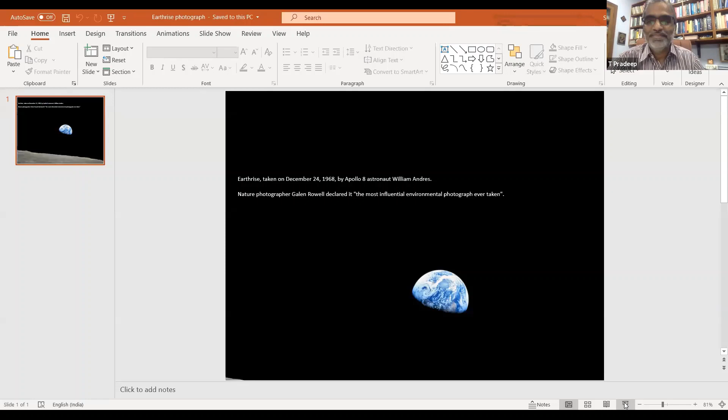Concern for the other is, in fact, the greatest human characteristic. It's in fact embedded in democracy.

One day, a child asked Mahatma Gandhi, 'Bapu, can you please define democracy?' Bapu said, 'Imagine that you are running a race and you have won it. When you win, remembering that there were others to lose is democracy.' Then he said, 'If you run alone, no one will win.'

Care for the minority, the underprivileged, and in the current context, the marginalized species, is in fact concern for the other. It is the greatest human gift.

We are here on this planet as nature enabled it. This enormously complicated ecosystem and its very delicate balance is evident in this COVID-hit period. If you do not see that complexity and yet simplicity, there is something wrong in our education.

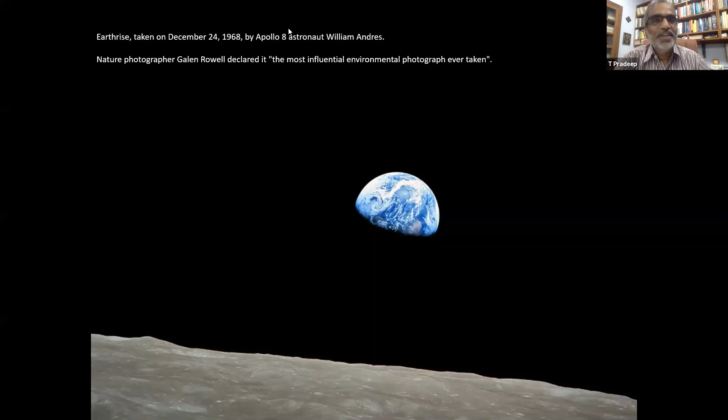Today we have two fantastic speakers, Dr. Saravanan and Ms. Shanta Sheila Nair - one telling us about capacity building, the other about policy. Both are equally important in making rainwater harvesting a reality.

And we'll conclude today with Jagat Singh Chowdhury, an eminent environmentalist who, with his life, has shown that a small piece of land can be converted into a natural rainforest. What a wonderful way to celebrate World Environment Day. Thank you very much.

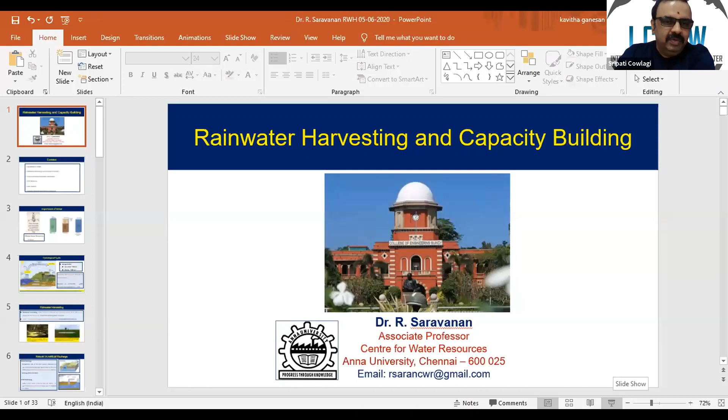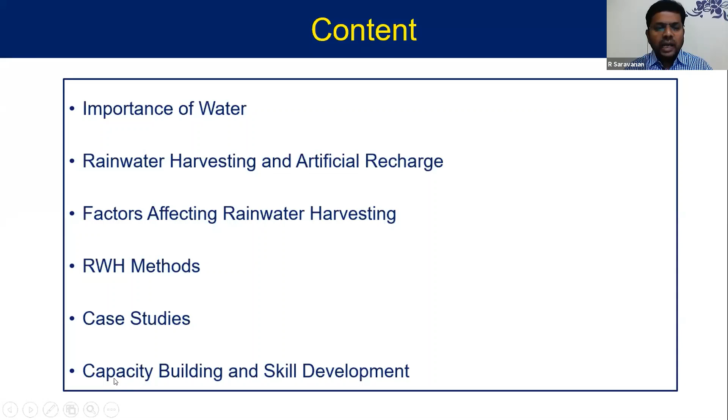Yes. Okay, so good afternoon, good evening, and good morning, wherever you are. I am here to present rainwater harvesting and capacity building. My presentation content goes like this: importance of water, rainwater harvesting and artificial recharge, the factors that affect the rainwater harvesting mechanism, the different types of rainwater harvesting methods, case studies related to rainwater harvesting carried out by the Centre for Water Resources, and capacity building and skill development ideas related to rainwater harvesting.

Now, the first slide talks about the importance of water. If you see the picture, you can understand very well. Once you carry your own water, you will learn the value of every drop of water. As you all are aware, the global water resources are constant. You can't create water, just as you can't destroy water. It will convert from one form to another. Our duty is only to manage the water.

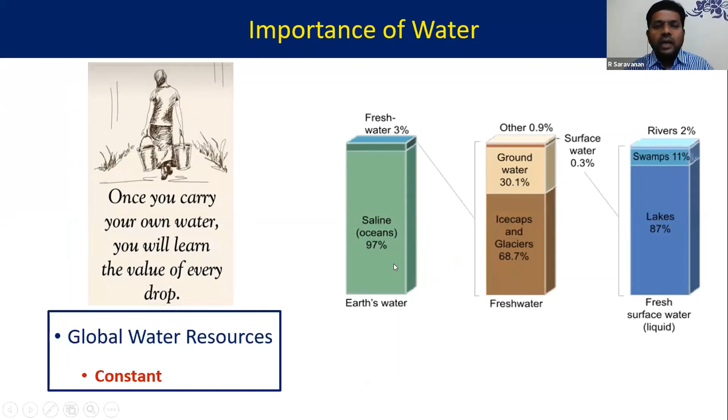So this graph indicates the global water availability, which you are all aware of. Now coming back to the hydrological cycle, the important component here is that around 80% of global precipitation takes place on the ocean, and 20% takes place on land.

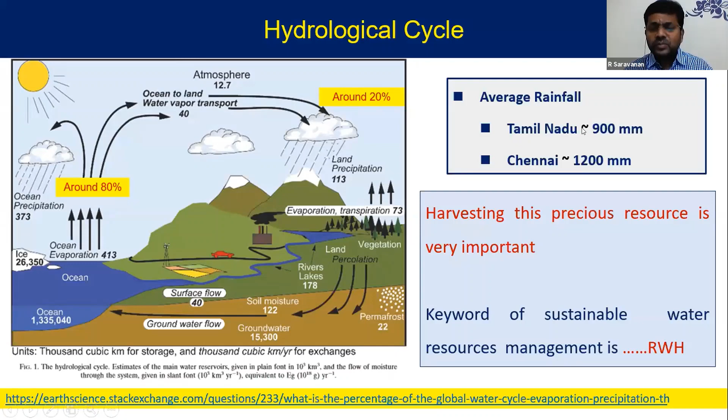Now you must be aware how precious rainwater harvesting is, and therefore the keyword of sustainable water management is nothing but rainwater harvesting. Chennai receives nearly 1,200 mm as the annual average rainfall, and Tamil Nadu's annual average rainfall is nearly 900 mm.

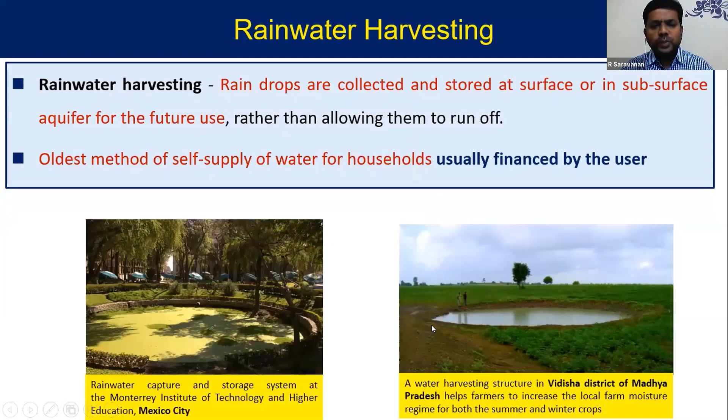Now, rainwater harvesting. We have several definitions for rainwater harvesting. Here I would like to quote it as: the raindrops are collected and stored at the surface or as a subsurface aquifer for future use, rather than allowing them to run off. This is the oldest method of self-supply of water for households, generally financed by the user. These are two pictures taken from Mexico and Madhya Pradesh, India, showing traditional rainwater harvesting practices.

Now coming back to the difference between natural and artificial recharge. Natural recharge refers to the precipitation which falls on the land surface, infiltrates into the soil, and moves through the pore spaces down to the water table by gravity. This generally takes place through leaking aquifers, rivers, streams, lakes and wetlands. On average, 10 to 20% of rainfall gets recharged to the groundwater by natural means.

But if you want to alter the natural recharge, you can inject water by altering the infiltration capacity. That means excess surface water can be directed into the ground by spreading it over a large area, as well as injecting it into recharge wells to replenish the aquifer. This kind of method is called artificial recharge. So both are by gravity, but this is a forced one.

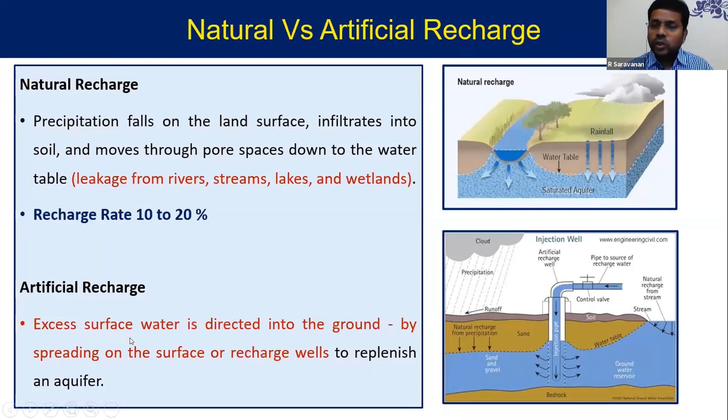Now, the factors affecting rainwater harvesting. There are so many factors affecting rainwater harvesting. Broadly, we can classify them into 4 categories: environmental factor, technical factor, economic factor, and operational factor. I would like to emphasize only a few points on all these factors: rainfall intensity, catchment area, and curve number. These are all the main important parameters for estimation of the runoff potential.

This is the simplest calculation given to estimate the runoff potential. Generally we estimate the runoff potential in terms of volume, whereas the recharge will be in terms of meters per day, which is the rate of recharge. So there is a difference between these two things, as you are aware.

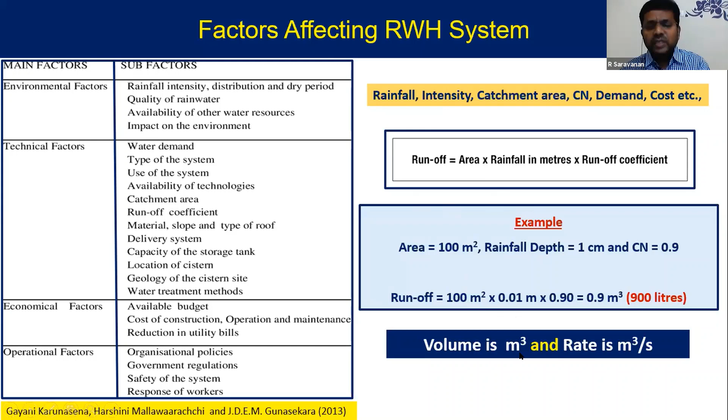This figure indicates how to estimate the volume of water one can harvest from the surface, either from rural catchment or urban catchment, as well as the rate of recharge capacity of any recharge mechanism, using these two figures. For example, to estimate the volume of runoff, it requires the catchment area and rainfall depth multiplied by the runoff coefficient, which is nothing but the curve number. If you multiply these, you will get the volume of water. With this, you can plan how much water you want to conserve in a lake, river, or ponds, wherever you want.

Whereas in case of recharge rate, if you want to estimate it, you must know the wetted area of the well or recharge pit, which is nothing but the circumference area multiplied by the hydraulic conductivity of the medium. Once you multiply these two factors, you will come to know how much water exactly you can inject from your recharge shaft or recharge mechanism into the ground, because there is a relation between how much head you are creating and how much water can penetrate into the ground.

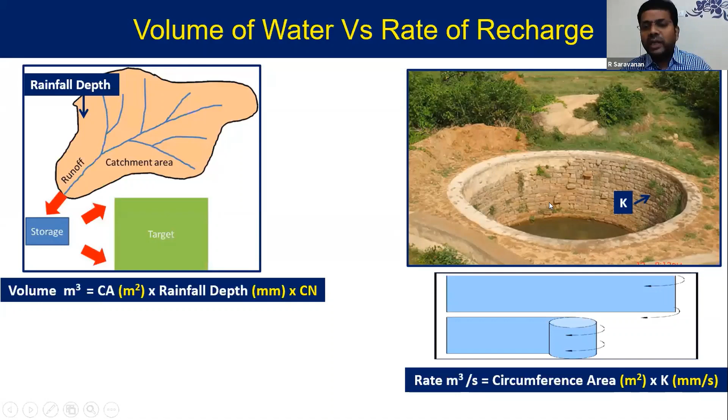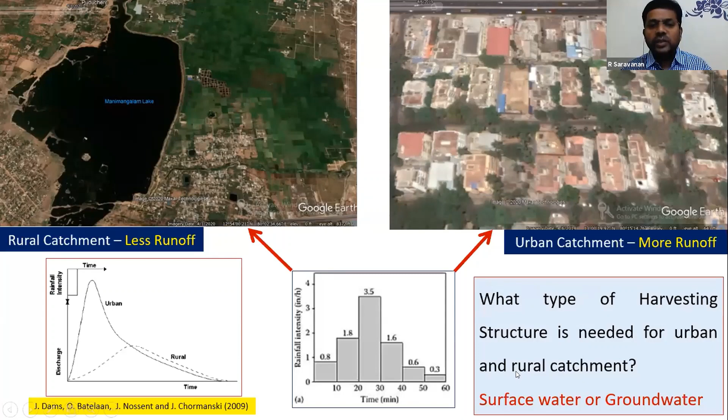Now, hydrogeology is the other factor which influences your rainwater harvesting mechanism. It plays an important role in deciding the type of mechanism because it depends on the aquifer properties.

The movement of water into the soil is governed by two forces: gravitational force and surface tension force. These are the predominant forces that allow water to move from the top surface to the ground. If you take sand, loam, and clay, sand will absorb more because gravitational force is much higher than surface tension force. In clay, surface tension force is more than in sand, which causes it to adhere a lot of water and not allow it to easily pass to the ground.

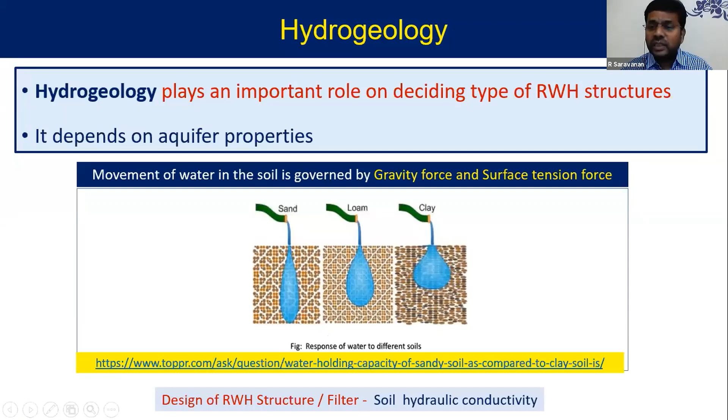Therefore, if you want to be a rainwater harvesting designer, you should understand these behaviors to design your rainwater harvesting structures as well as filters, based on the hydraulic conductivity.

Now, the groundwater movement: whatever water enters into the ground is generally called groundwater. The specific definition is the water available below saturation of the water table, called groundwater.

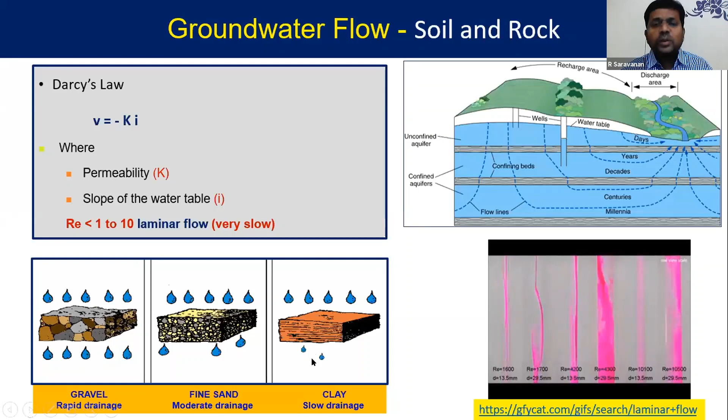Therefore, recharge or injection takes its own time to recharge the groundwater table, which is what I want to emphasize. But this figure also indicates that if you recharge 5 drops of water in a gravel medium, it immediately absorbs all 5 drops, whereas clay absorbs only 30% or less than 10% into the ground.

These mechanisms are highly required to decide what type of rainwater harvesting mechanism to use in rural as well as urban catchment. We have broadly 4 types of mechanisms: direct surface technique, direct subsurface technique, combination techniques, and indirect techniques. The first three are almost familiar to you.

The indirect techniques are nothing but forced injection and pressure injection. Suppose cracks are not available and the porous medium is not available within the ground's geological formation, you can blast the ground to make artificial fractures and inject the water into the ground.

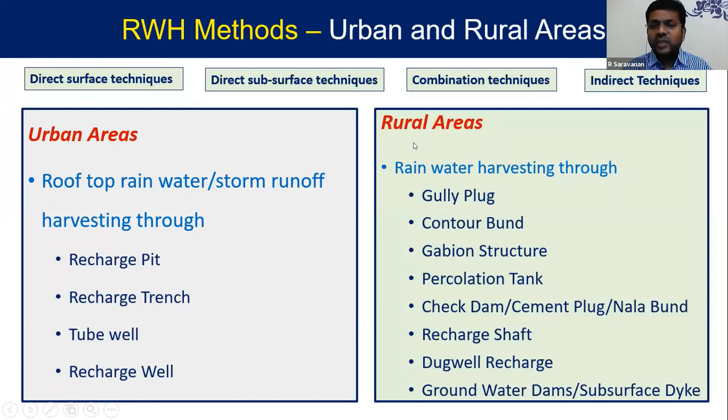Coming back to the urban rainwater harvesting type, generally we harvest rainwater from stormwater and roof, which is harvested in the recharge pit, trench, tube well, and recharge well. In case of rural areas, we have several methods which we will discuss in due course.

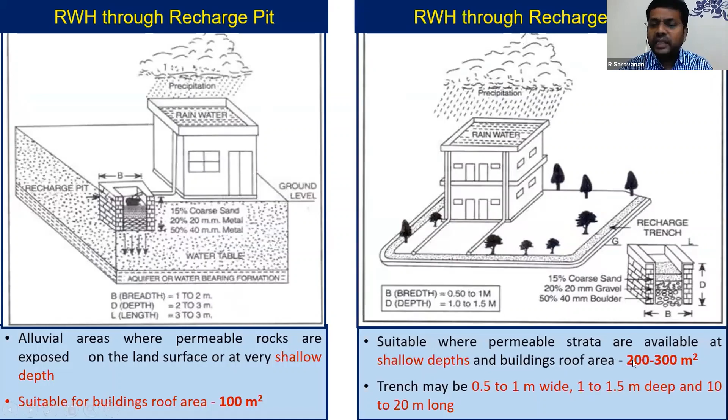Now, rainwater harvesting in urban areas. When deciding rainwater harvesting in urban areas through stormwater or roof water, the recharge pit is suitable when you have a roof area of nearly 100 meters square and a shallow water table depth is available. In case of recharge trenches, where you have shallow water table level and catchment area ranging from 200 to 300 meters square, trenches are preferred.

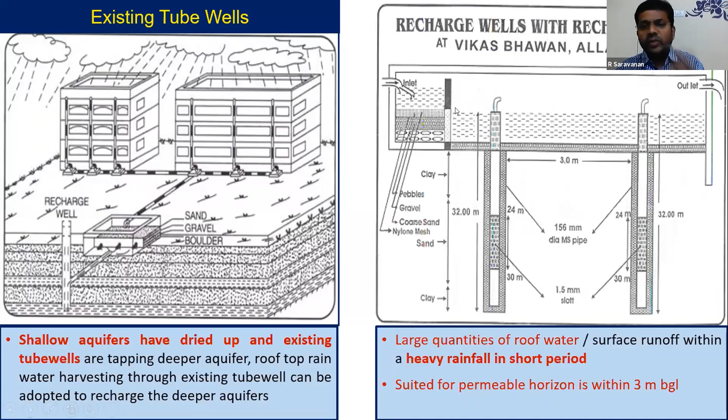You can also use existing tube wells, including abandoned ones, to harvest stormwater as well as roof water and inject it into the aquifer, either confined or unconfined. Due to climate change, rainfall intensity can be very high within a short period, causing huge runoff quickly. At that time, to store and inject the water, you need a combined method: the trench along with the recharge shaft.

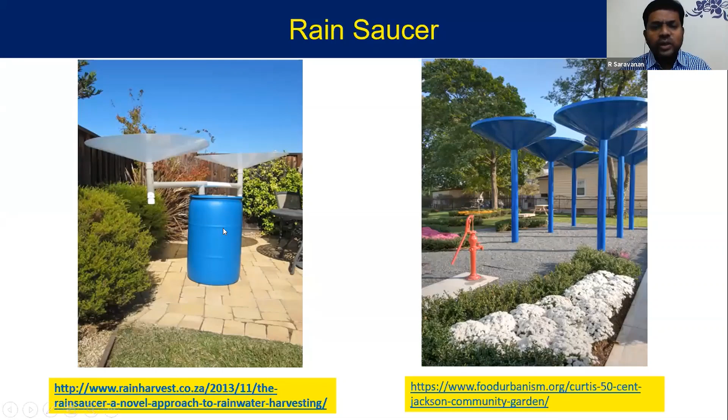Now for another method, this one is portable as well as ornamental, derived from our indigenous technology. It's called a rain saucer. You can carry it anywhere, and it can be installed in gardens and lawns. Most people think of rainwater harvesting only through roofs, harvesting into drums and tanks and similar things.

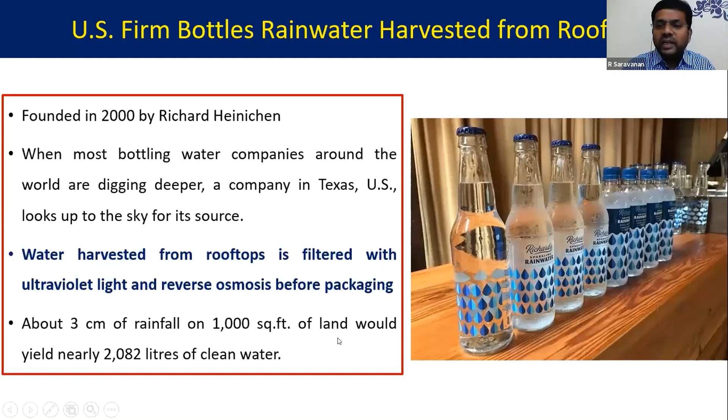A person from the US, in 2000, named Richard Heinichen, noticed that most water companies around the world were digging deeper to extract groundwater for bottling. Instead, he sought water from the sky, harvesting it from rooftops and filtering it with UV light and reverse osmosis before packing. He estimated that 3 centimeters of rainfall over 1,000 square feet of land would yield nearly 2,082 liters of clean water.

Now coming back to rainwater harvesting systems in rural areas, we have several methods. One is the gully plug, or contour bund method. This method is basically used to conserve soil moisture in the watershed for a long period, and is more suitable for low rainfall areas.

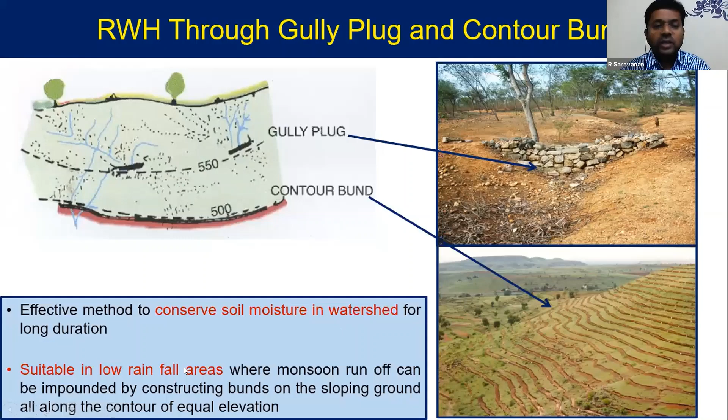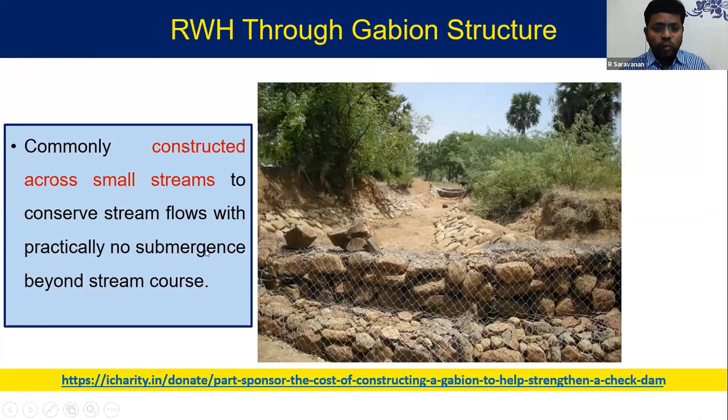This is the gabion structure, which tries to obstruct the flow temporarily and is commonly constructed across small streams to conserve water and improve the local groundwater table level in the surrounding area.

And the percolation tank. Generally, percolation tanks are preferred where you have highly fractured and weathered rock available, and the downstream of the tank should have a sufficient number of wells as well as cultivable land. If these are available, this method is preferred to benefit the people in the command area.

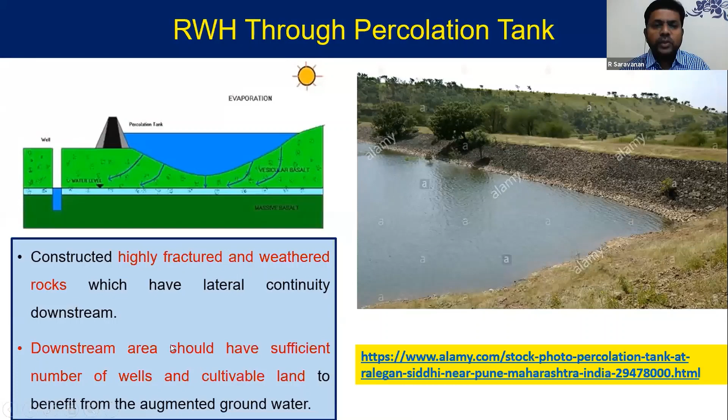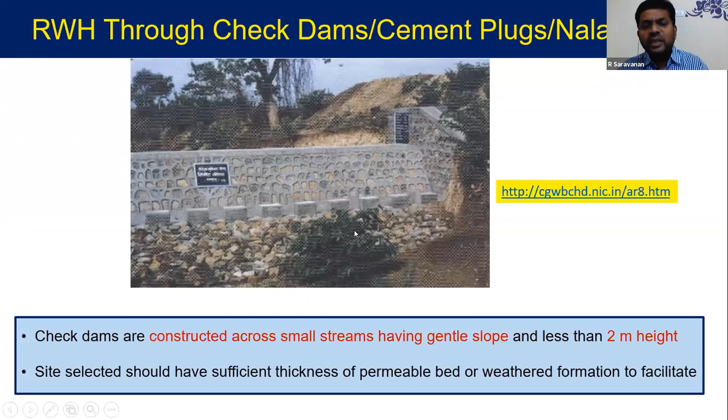Then the check dams, also called cement plugs or nala bunds, which are highly suitable across small streams with a gentle, mild slope. Generally these structures are recommended to be less than 2 meters, and they basically retard the flow for a certain time to recharge the groundwater.

Then the recharge shaft. Recharge shafts are widely used in tanks and lakes to infiltrate water into the lower unconfined aquifer by means of the recharge shaft.

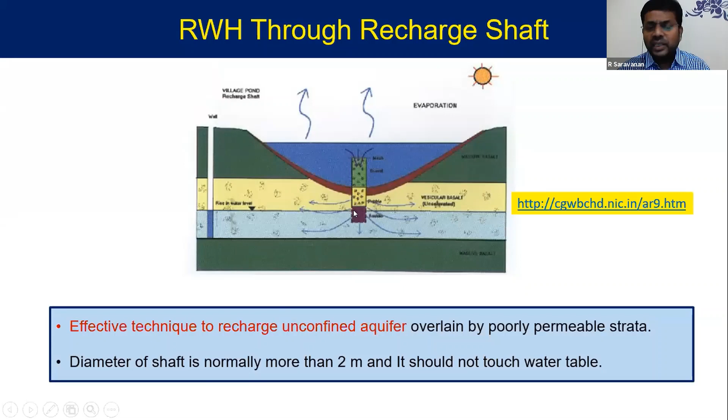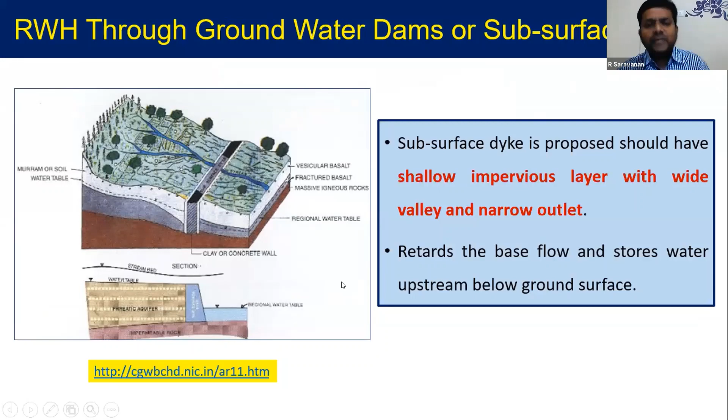Now coming to capacity building, I'd like to talk about our own Center at Anna University. The Center for Water Resources was established in 1971 and is a pioneer center carrying out rainwater-related studies and capacity building for the past three decades, working with different agencies, both government and non-governmental organizations, in various capacities as consultant, implementing agency, expert, and so on. I'm proud to say that Times Higher Education has ranked Anna University 7th in the world in water resources among about 800 universities worldwide.

This ranking is due to our focus on the sustainable development goals. The center has faculty members from diverse disciplines in water resources engineering and management, who are experts in various tools and software related to water resource management. We are fully equipped to develop capacity building at any level.

The center also offers PG programs like hydrology, water resource engineering, and irrigation water management, which enable students to build capacity in water management. Rainwater harvesting is incorporated in our syllabus for both undergraduate and postgraduate students to build their capacity. The center also frequently conducts workshops, training programs, and stakeholder meetings related to water management as part of capacity building.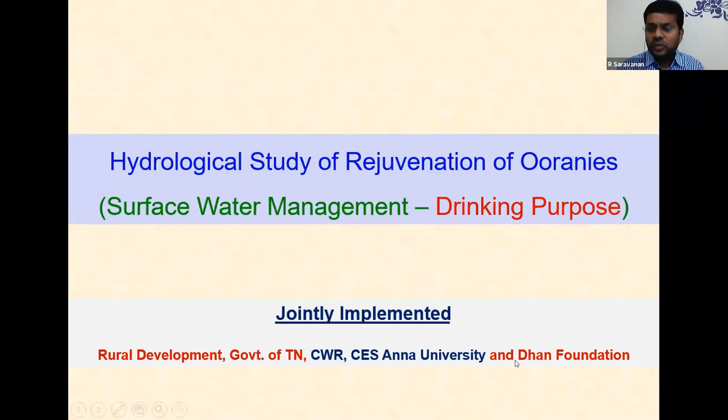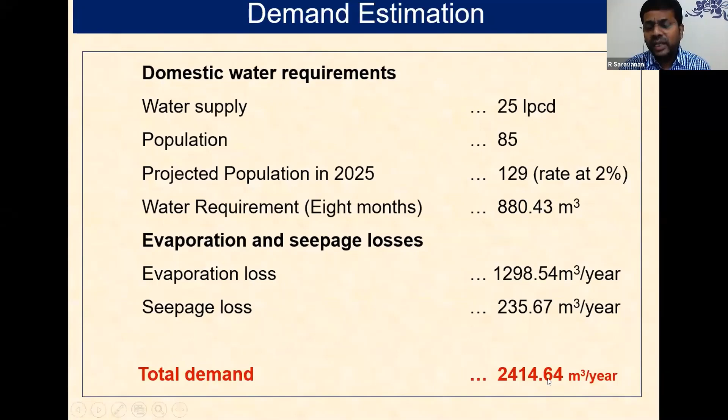The tank, a small tank, was taken from Kanchipuram district, Edaiyur village, Thirukkalukundram block. The name of the Urani is Sulthanmedu Oorani, and we estimated the demand for the total year. Since 3 months is the rainy season, we considered only 9-month demand as a capacity to design the Oorani. So we arrived at nearly 2,400 metric cube per year as the drinking water demand for the Urani, at the rate of 25 LPCD.

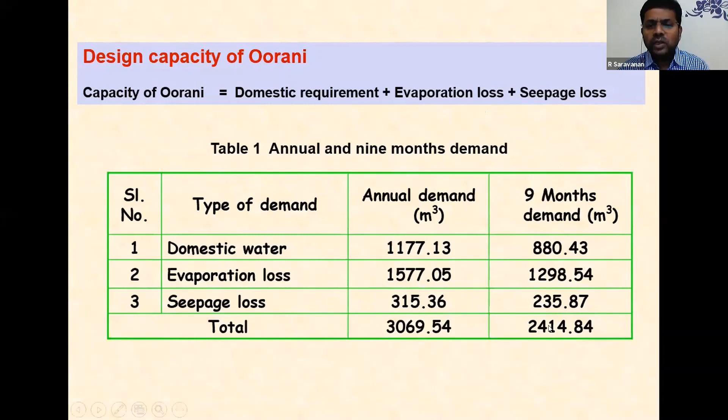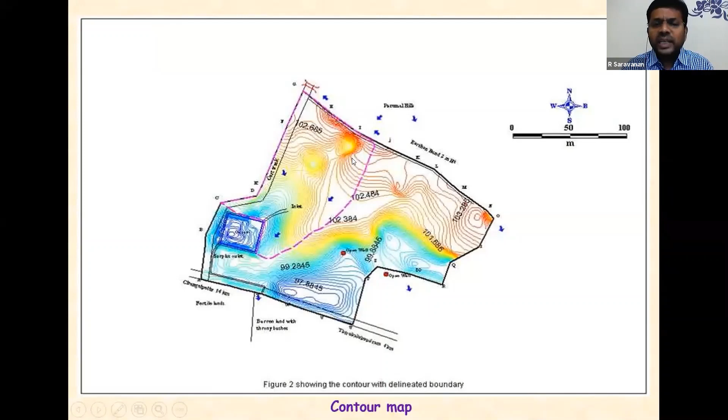The survey was carried out to delineate the catchment in terms of contours and other things. By delineating the catchments, we are able to identify the flow direction, from which direction the water will flow towards the tank that we designed. We also identified the catchment and land use pattern of the Urani—this is the barren land, this is the agricultural land.

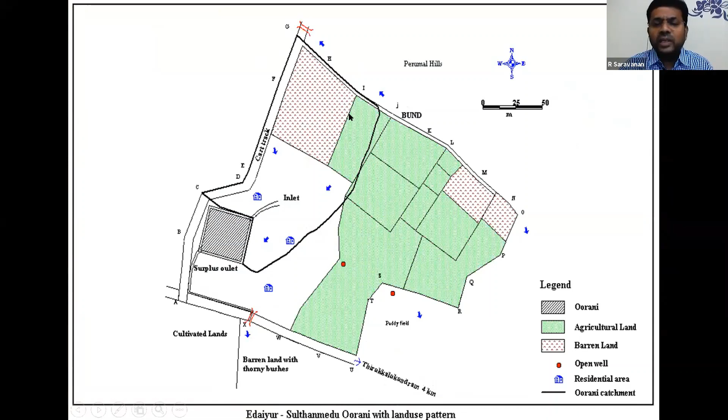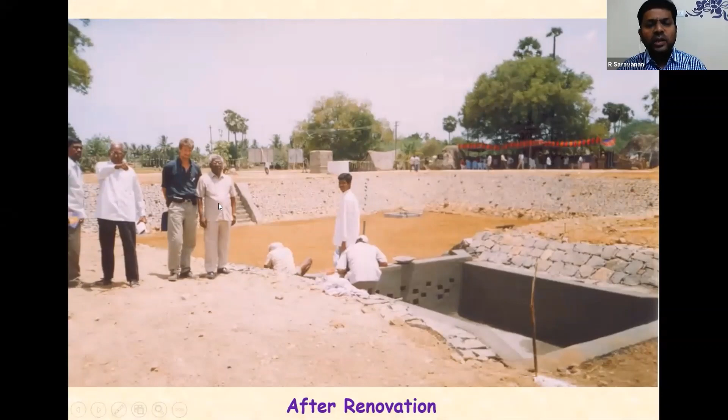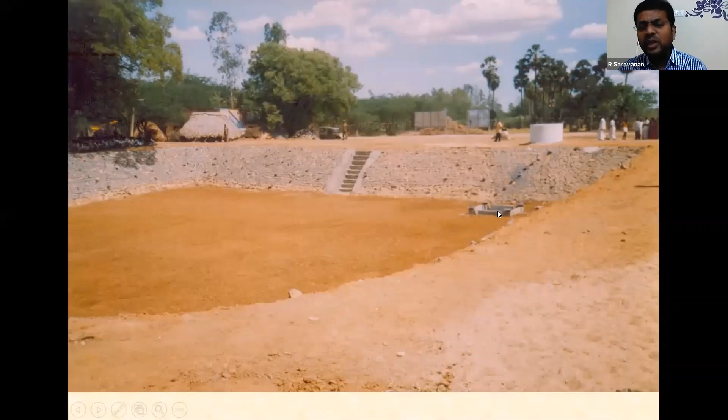This is the silt trap, and this is the horizontal filter provided at the bottom of the Urani tank. From here we connected the collection system. The village people are not allowed to enter the well; instead, they are allowed to withdraw water from this well, which receives water from the horizontal filter.

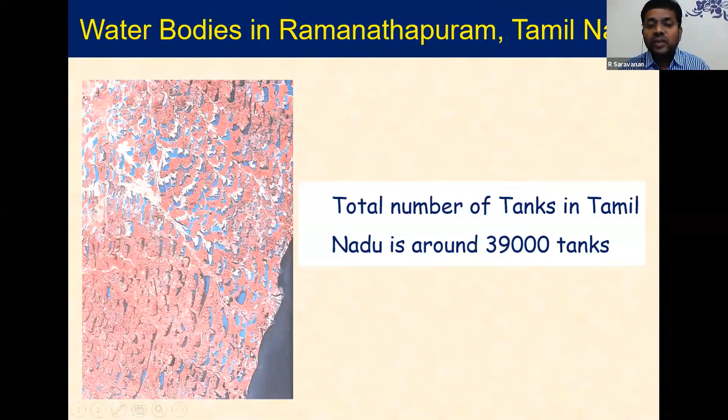This is the status of the Urani after rainwater, and this silt which accumulates is periodically removed. This is the water being pumped from the well, after the rain in 2015. So you can see that even one small tank can make a significant difference in drinking water supply. In Tamil Nadu we have a total of 39,000 tanks, and we can do a lot of wonder with them.

Now I would like to present a second case study on rainwater harvesting implemented at Anna University. Sivakumar, also on the panel with us, visited our campus based on a request by our Vice Chancellor, and he provided his expertise.

This is our campus map of Anna University, which consists of four campuses: CEG, SAP, ACTech, as well as the MIT campus. This is the quarters area, and the total area is nearly 246 hectares, and this is where our Center for Water is located.

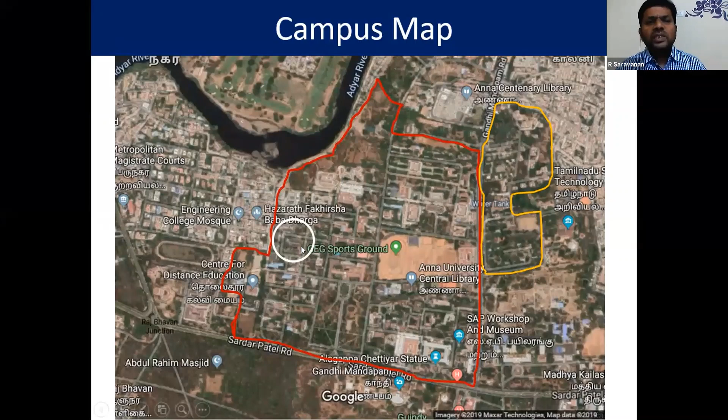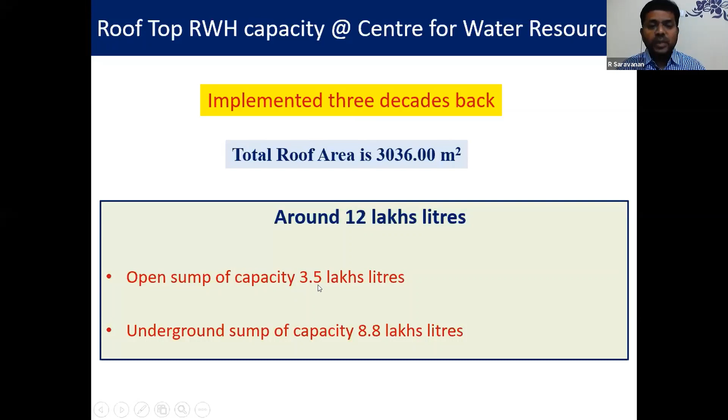The rooftop harvesting capacity at the Center for Water Resources was implemented 3 decades back, with a capacity of nearly 12 lakh liters, and a roof area of nearly 3,036 square meters. There are 2 tanks available, with an open sump capacity of 3.5 lakh liters and an underground sump capacity of 8.8 lakh liters.

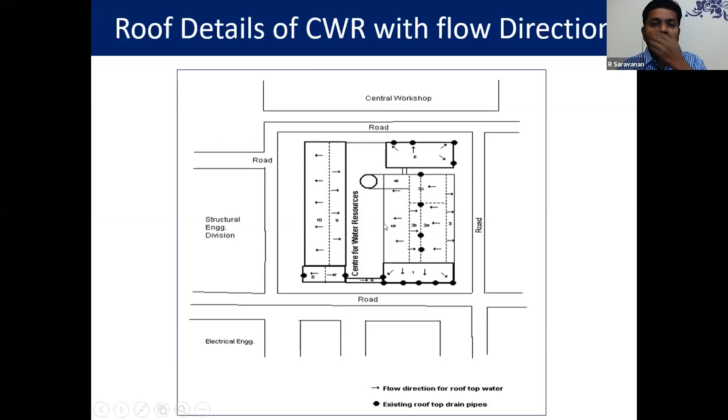This is the top view of the open sump, and this is the underground sump everywhere. This is the rooftop of a CWR, and the gutter provided is an open sump with 3.5 lakh liters capacity, collection pipe, low level tank, and collection pipes. So this is a roof area.

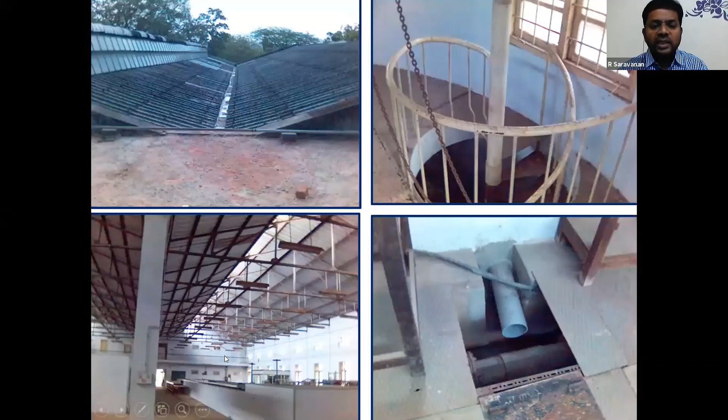This is our postgraduate laboratory. The entire building is standing above the underground tank, where you can store nearly 10 lakh capacity of water within this area. So we have a deep, almost 30 feet deep well, which was initially constructed more than 40 years back for hydraulic experimental purposes by harvesting rainwater.

Still, we are using this well for our own rainwater harvesting. One important thing is, for all our hydraulics laboratory needs over the decades, we have met the water requirement for students only from rainwater harvesting. This is the excess flow from the tank whenever rainfall is excess, and it will be diverted to the ground.

Now coming back to the campus rainwater harvesting, the technical support is provided by the Center for Water Resources as well as the Geology Department, implemented by the Estate Office as well as deans of various campuses. So we have nearly 246 hectares of land, and we have used nearly 46,986 square meters of area for rainwater harvesting.

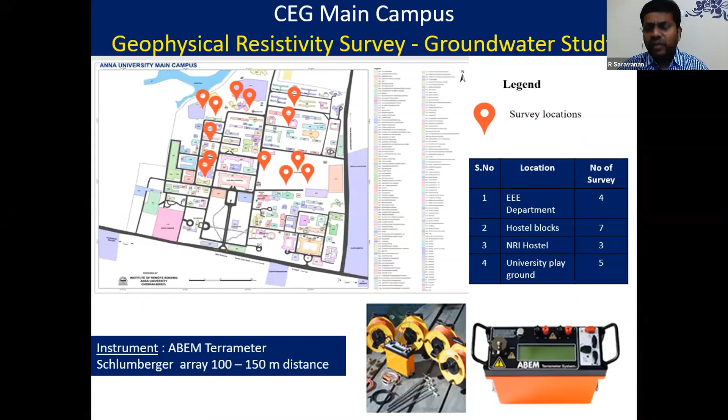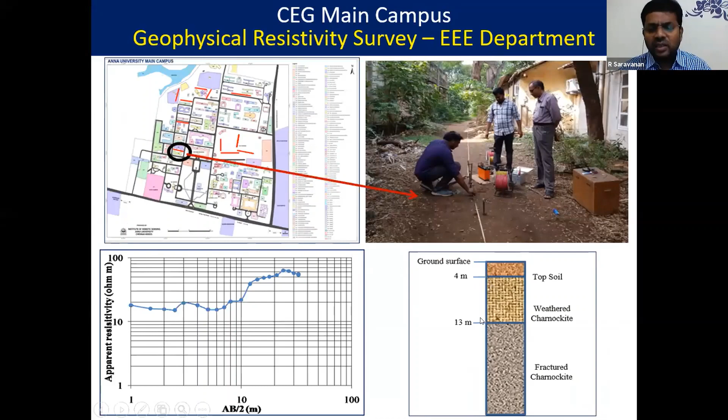This is our campus map, and with the help of the Geological Department and Dr. Ilango, we carried out the resistivity survey to find out the geological formation at various places of CEG campus, and we estimated the soil profiles to suggest what kind of recharging pits and things can be recommended. This was done under Professor Ilango, and at various levels we carried it out.

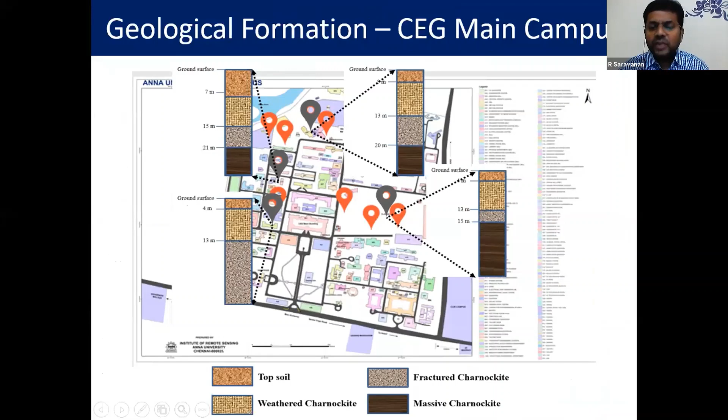Now this is the consolidated geological formation of Anna University represented here: the topsoil, fractured charnockite, weathered charnockite, and massive charnockite. This is the general geological formation of our Anna University campus.

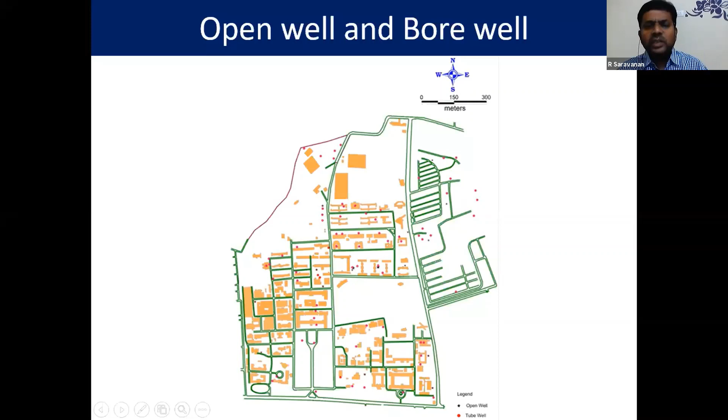These are all the open wells and existing bore wells which already exist and proposed ones based on our geological investigation. Most of the wells, and open wells, are utilized for our own rainwater harvesting. And to identify the suitable location for rainwater harvesting, we also did a DEM analysis.

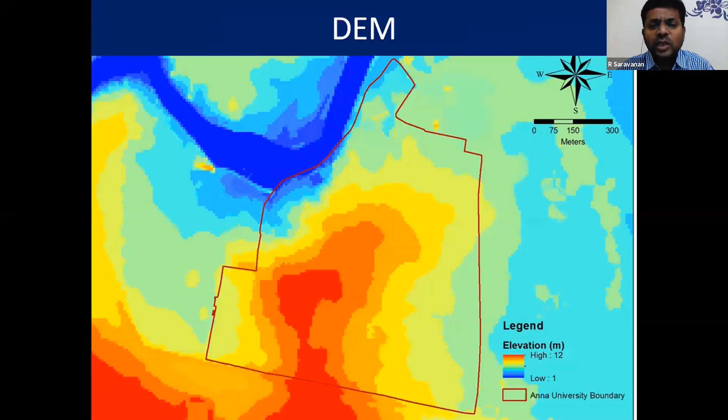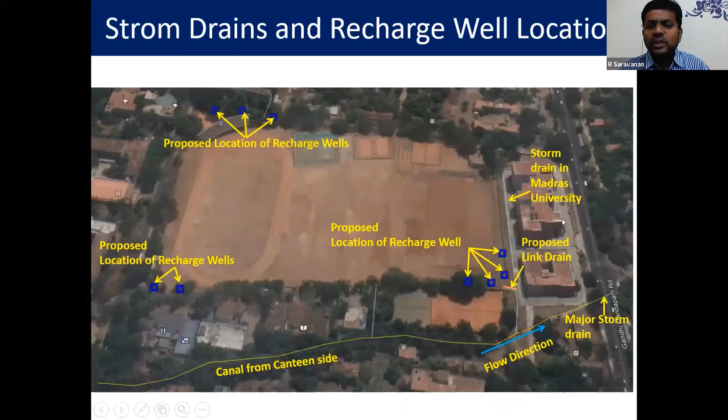A digital elevation model, to know the flow directions and accumulation flow direction. These are all the flow accumulation directions, used to find out the suitable location for recharge. Based on that, this is our open ground, and we have proposed suitable locations for the recharge shaft, trench, and pits based on the volume of water.

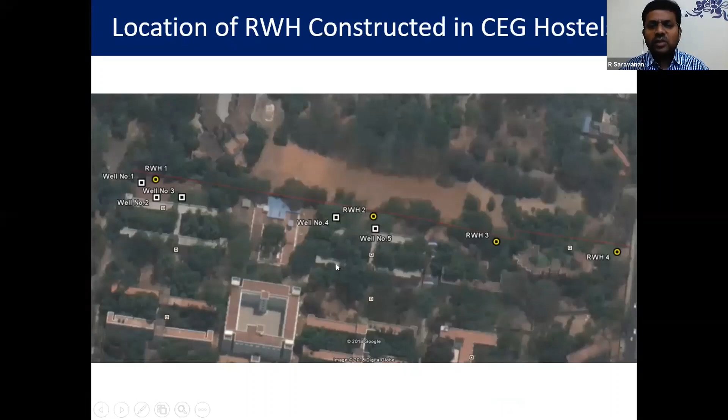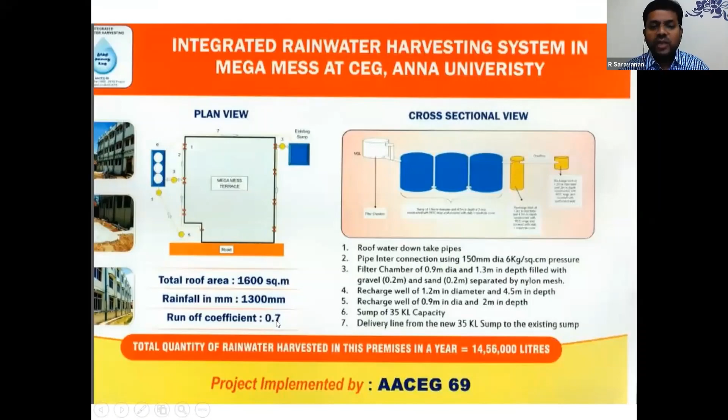1969 batch, with a harvesting capacity of nearly 14 lakh liters in a year. They funded it, and with the total roof area of 1,600 square meters, and with the runoff coefficient, we are able to capture nearly 14 lakh liters in a year.

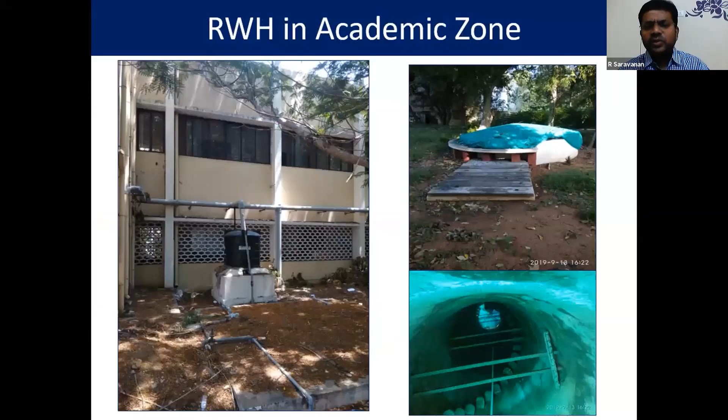This is a view of the hostel as well as the mega mess structure. These are some of the photographs in academic zones which have executed rainwater harvesting, and this is in the hostel zones.

Now, coming back to capacity building: capacity building is nothing but the process by which individuals and organizations can gain and retain the skills, knowledge, tools, equipment, and other resources needed to do things on their own competently.

So, if one wants to be a successful rainwater harvester, as part of the capacity building process, one should have knowledge of the following: broadly, the environmental aspect, technical aspect, economical aspect, and operational aspect.

The important point under the category of environmental aspect is one should know the rainfall intensity and distribution. When it comes to the technical aspect: catchment, roof type, slope, runoff coefficient, geology, water potential, etc. The budget is also one of the important constraints - the construction cost and O&M cost.

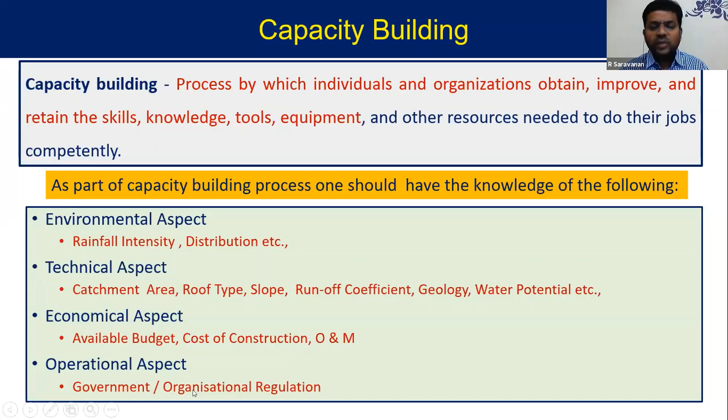One should also be aware of the policies of the organization as well as government regulations available on rainwater harvesting. Besides, stakeholders should also possess knowledge in the following areas: one should understand what indigenous knowledge is available, which can be used for most site-specific conditions.

Therefore, knowledge about the development of indigenous rainwater harvesting systems for our conditions requires understanding the rainwater harvesting framework - conceptualization, site characteristics from a hydrological and hydrogeological point of view, economics including cost involved, and the alternatives available based on area and size.

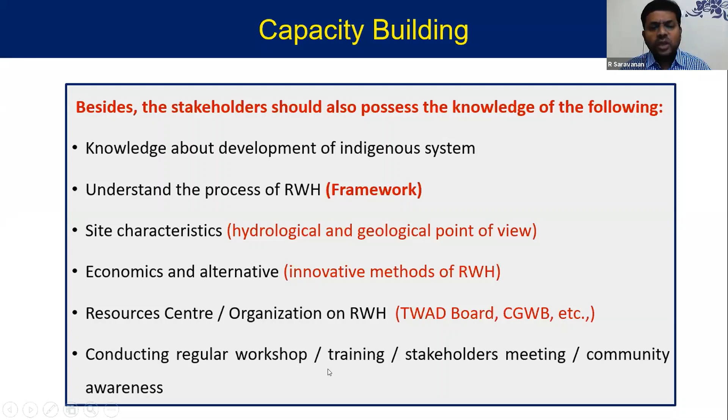If you want more information, one should know the resource centers available, government agencies like the TWAD Board, CGWB, the Rain Center, and other allied departments. Conducting regular workshops, training programs, stakeholder meetings, and community awareness is also very important. And coming back to the academic point of view...

To build the capacity of students, we should offer a course on rainwater harvesting targeting participants in the particular discipline, focusing on designing and construction activities, so that once they graduate they will be able to design rainwater structures and execute them well by understanding the technical and environmental parameters. The course should emphasize success stories, case studies, and field trips related to rainwater harvesting.

Now, regarding skill development for the practicing engineer - we should design a course of nearly 2 to 4 weeks with certificates, entitling them to do rainwater harvesting in the public or private sector. Hands-on experience should be given in designing rainwater harvesting structures for urban, rural, agricultural, and institutional areas, so they gain practical experience and become familiar enough to implement it, through small vocational training.

The best practices in each of these areas ought to be highlighted as case studies to the practicing engineer. They should also be exposed to the regulations and norms of rainwater harvesting - this is very, very essential.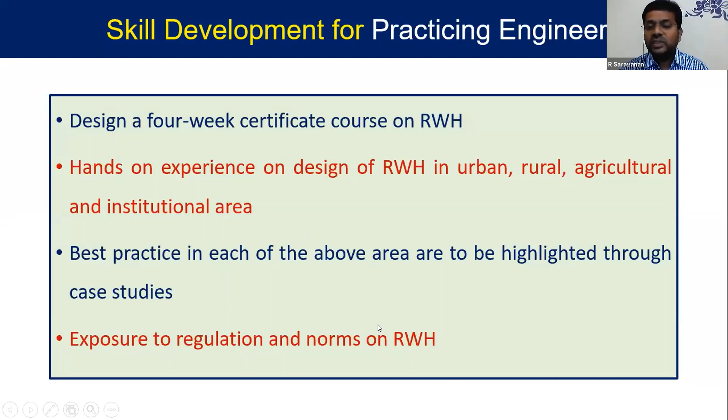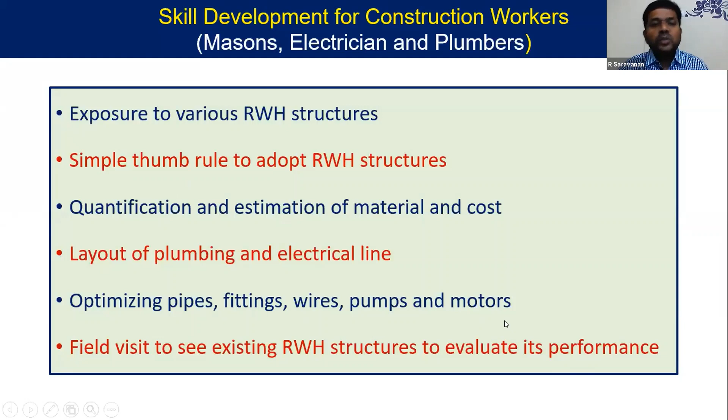We have one more minute, sir. Yeah, I'm going to conclude.

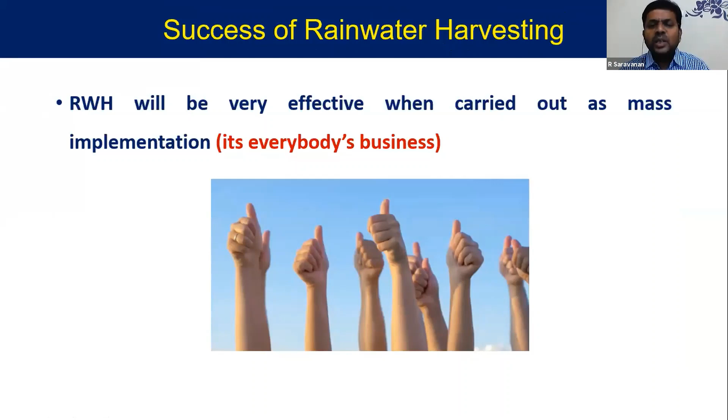Success of rainwater harvesting lies here - it will be very effective only when carried out as mass implementation. It is not an individual business, it is everybody's business. Thanks to the then Chief Minister for bringing out the Rainwater Harvesting Act as mandatory, with contribution also from Madam Santha Sheela Nair. Thank you for the time given to present all our thoughts within half an hour.

Thank you, Dr. Saravanan, for the elucidating presentation on several basic facts we need for runoff, stormwater, recharge, and rooftop harvesting structures, and the capacity building initiatives, and what Anna University is doing currently with several stakeholders. You mentioned several examples, and the stalwarts of these examples are with us today - Mr. Nair, Sri Shekhar Raghavan, Mr. Shivakumar from Bangalore, and Mr. Vijay, our earlier speaker. Many of them are on this call today, and we are blessed to have all of you to take these thoughts forward. We are flooded with activities to be done as we end this webinar series today.

Now I would like to quote one small verse from Tirukkural that we follow in Tamil Nadu: Katrathu kaiman alavu, kalladhu ulagalavu. In the sense, whatever we have learned so far is very, very small - we need to learn a lot. It is something like the sky that we have to learn. Ulagalavu means it's like a big world that we need to learn, where lots of things have to be learned still.

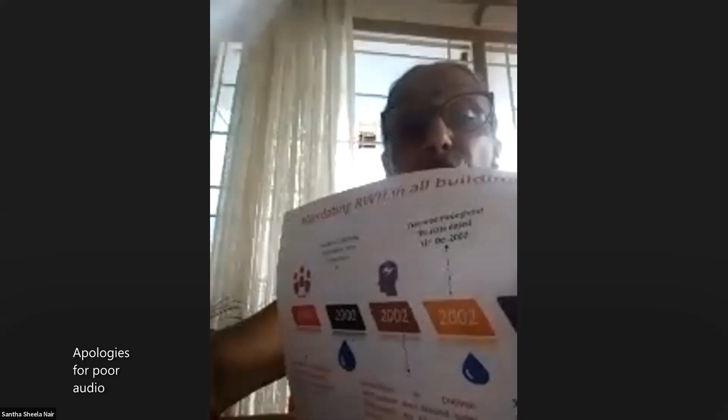The concept of rainwater harvesting was initiated as early as 1994 by Metro Water. At that time I was in Metro Water, but the predecessor had initiated the work of rainwater harvesting as a capacity building. I will show you a screen on the work done from 1994 to 2000, let me clarify.

So in 94 we started, in 2002 we improved it with some amendments, and in 2003 the law was passed which made it mandatory for the states.

Now, what was the difference? Earlier we had initiated action in terms of groundwater legislation and building rules. Later, when the ordinance was passed and the law was made, we amended the law itself, both in the municipality rules and the Groundwater Act, making it mandatory for all buildings for the first time — and only for buildings. This was the new thing introduced.

The most important point I would like to make as a former bureaucrat is that the efforts from 94 to 2003 were mostly bureaucrat-led, and they had relatively limited success. It was only when political will came into play that it became a much more serious affair and much more successful in the concept being acted upon and implemented.

Most importantly, it was the first time a political election manifesto talked about rainwater harvesting. This is an important point for all of you to understand: unless it is owned at the political level and becomes an issue in an election manifesto, it does not gain the priority that the government would normally give it.

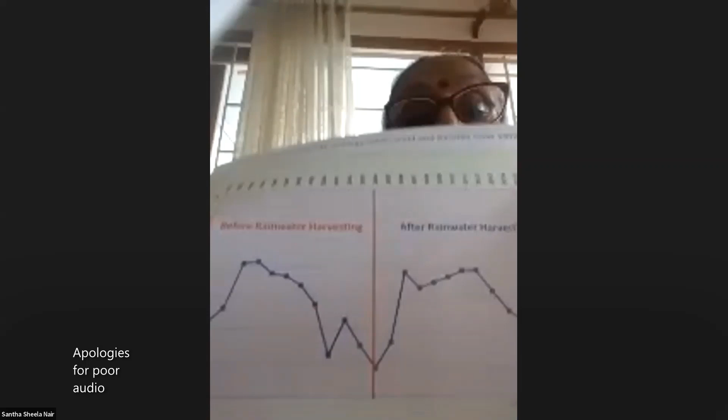Some part of the water harvesting at the ground level. Yesterday I probably made some mention of this, but this is the level of impact before and after rainwater harvesting. This is a small graph to show you that there is considerable impact in terms of the levels of water supply.

It is also important, as all the analysts and other experts have taught, that harvesting is not only a means of improving the level of water supply in the ground, but it's also a means of improving the quality of the water in the ground. It contributes to diluting the salts, diluting iron content, diluting fluoride. Arsenic, it doesn't help much with, but all the other problems with water quality are very much addressed by rainwater harvesting and rejuvenation of aquifers in terms of quality. I'd like to show this to you - I don't know how clear it is, but it gives you an idea of the levels of quality improvement in the water and the levels of quantity improvement.

So there's a big case for rainwater harvesting to be done, not merely to increase the supply in terms of groundwater aquifer recharge, but certainly also to take to areas which have iron content, which have water impurities, particularly fluoride. I was later secretary to the Government of India in the water supply department, and we took it to an area of fluoride contamination, and we found a considerable impact in reducing fluoride levels to ppms which are considered safe and consumable. This was a great revelation to us, and we have to promote water harvesting as something which not only improves the quantity of water available in the aquifer, but also the quality of water available.

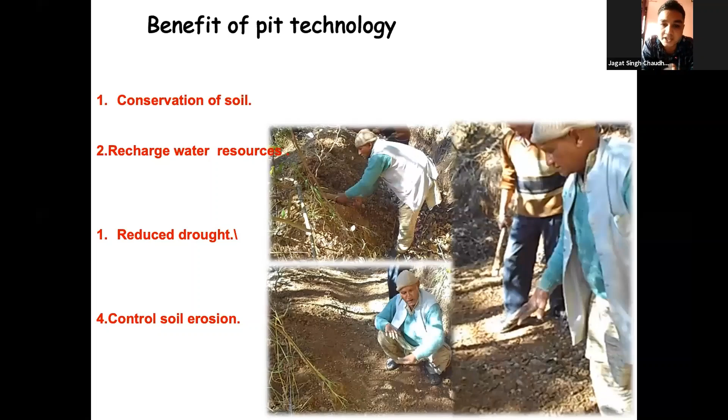I think it's ended. Sir, I have finished. Sorry, finished, sir.